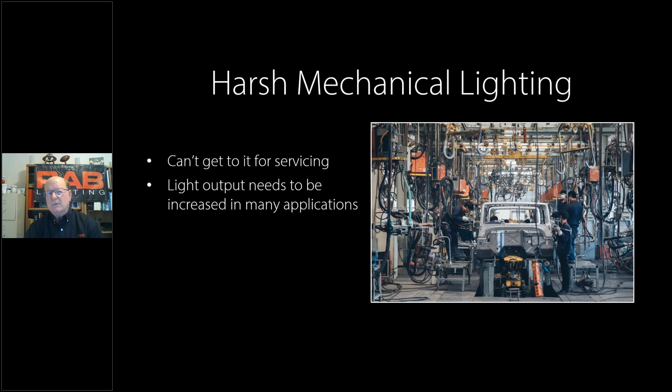So here we go. Going into a mechanical harsh environment. If you think about this, you can't get to it for servicing. You see all of these things in this picture, all types of obstacles, things that prevent you from actually providing the service that you need to do. The light output needs to be increased in many applications, and we'll see why in just a few minutes, because there's multiple reasons. You just have to increase the overall lighting because there's so many things that are in the way. And then the vertical obstructions make it really difficult.

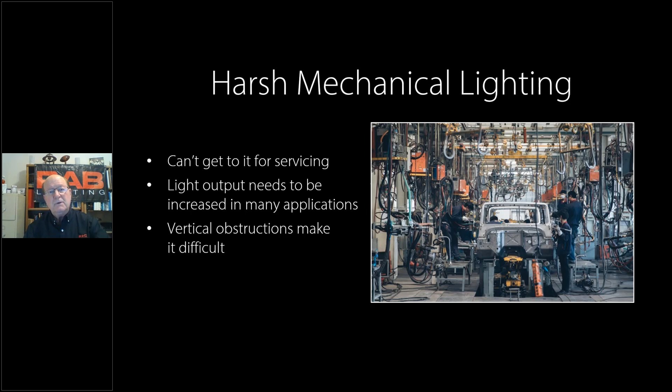So it's not just the horizontal, it's very cluttered, if you can call it that, and it's hard for the light to bend around a corner. In fact, it's impossible, except maybe if it's reflected off of another surface. So that's really important. And then shadows are often present because of all these vertical obstacles and other things that are in the way. And so you've got to be prepared to shut down operations. It could be anything, any kind of surprise. We'll talk about fluid motion in just a few minutes, but for various reasons in a harsh environment, you've got to be prepared to shut it down and be ready to do that.

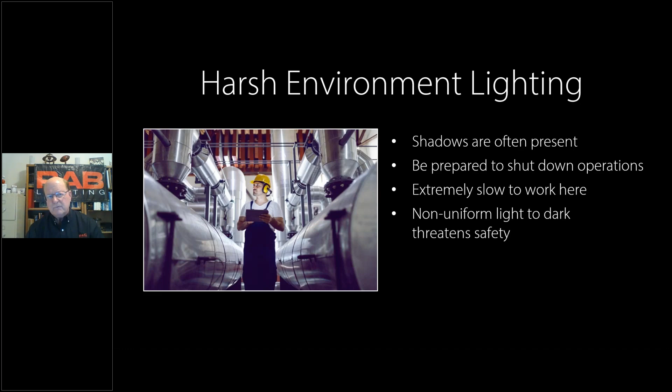Also, because of this, you work slower. You just can't work at a normal pace in a hazardous location. It's almost impossible to do that. And then we have this non-uniform light. The dark threatens the safety. You don't feel safe, certainly because of all the shadows. And so more general lighting may be needed. You may not even be able to put a specific light close to where you're working for whatever reason. So you have to increase your general lighting to get the reflections to increase and get where you need to go.

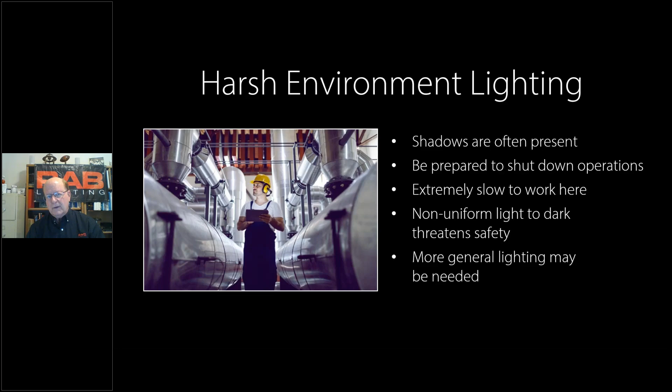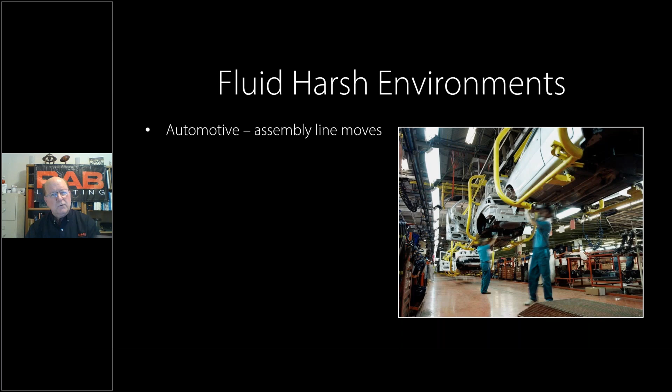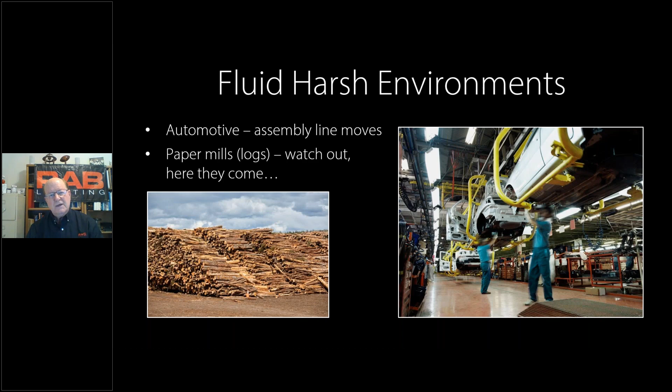That's very unusual and not common in general applications. So now let's talk about the fluid, harsh environments. And by fluid, we're really talking about motion here. So think about an automotive plant where the assembly line moves or other things move that cause this to be different. What about this? So paper mills, we need to get out of the way because here they come, right? So the safety is a big factor in those applications.

So now let's move over to chemicals. So here's a story for you. So this contractor, and I'm going to call his name, he's a friend of mine in the lighting industry. His name is Roger Lane. So he told me about a personal story of his where he was working on a lighting retrofit job, and he got up the next day to put his shoes on, and he noticed that the soles of his shoes were disappearing. They weren't what they were the day before because of working in that environment with all the chemicals. They were coming apart.

And so special conduit coating lasts only 2 years. That's another thing. You think about conduit, putting it in, it's going to last 40, 50, 60 years. In a harsh environment, not the case. And so they're often worse than salt environments. And people say, there's nothing worse than salt. Yes, there are. And so chemical environments are like that.

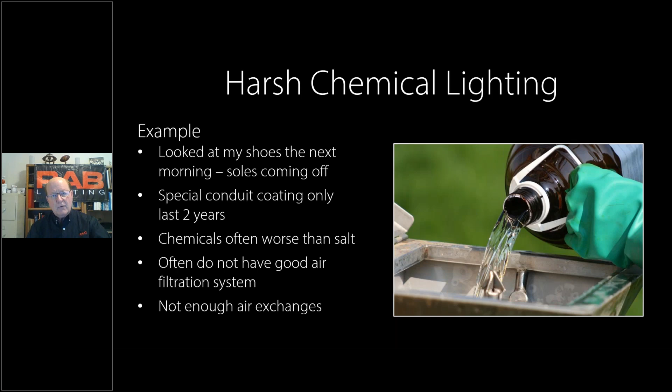And then with these chemical environments, you don't have the good air filtration system. So if you're breathing something that's not good for you, we know that's not good for our long-term health. And so we don't have enough air exchanges, possibly. That's really important from an HVAC design standpoint to account for this harsh chemical environment.

So that's another one. And speaking of this, in a chemical plant, you have two separate monitors on the human body, that's what you have in this application. If either one of these monitors goes off, you have to exit the plant immediately. So that's what they do to protect the people that are working in that environment.

So let's now move to corrosion-resistant finishes. Now this is your friend. So what are you going to do with light fixtures working in some of these environments? So RAB introduced in 2017 corrosion-resistant finishes. Some of those include salt spray, which we just talked about, or maybe acetic acid salt, or maybe you go up and down in humidity, so it's cyclical, or maybe sulfur dioxide.

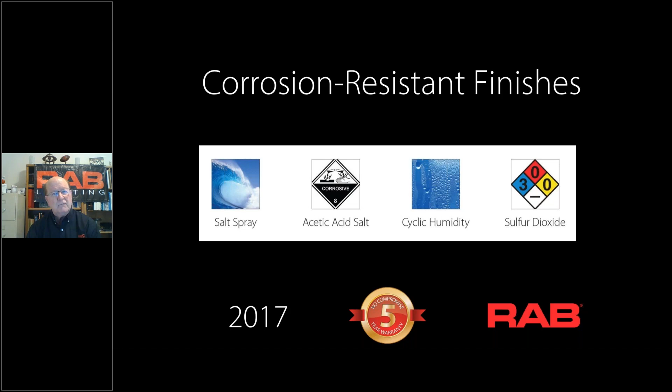So first of all, this corrosion-resistant finish mainly works on metal fixtures, not on plastic fixtures, as a general rule. Many of the fixtures at RAB can be adapted to this corrosion finish. Not all. So if you have a situation like this where you need protection, check with our district sales manager or our rep, and we'll find out, if we don't already know, if this can be applied. It's a little cost adder. It certainly takes a little longer lead time, but it's available and it could be a lifesaver for your project.

Now, here's an example. So chlorine, that's a chemical in the swimming pool area. This particular floodlight is an FX300 with this finish applied. And so this is the application that we have, lighting from the perimeter in Texas.

So when we think about harsh lighting, it's not always chemicals or other types of harsh things. It also could be environmental lighting. So what about light trespass? Light trespass is going beyond the perimeter and making it harsh, maybe for the neighbors, spilling across that property line, or maybe lighting going up and lighting the sky and having sky glow.

Or perhaps the last one is glare. We've all been where this guy is, where you have these blazing headlights coming into your eyes, putting a veil over your eyes so you can't see. So this is also harsh lighting, and we at RAB have ways to mitigate that.

So it falls into a little bit different type, but it can be a form of harsh lighting. Here's a story that's very interesting. So Wendy's, everyone I'm sure knows Brother Dave and the square hamburger. And so there was a lighting ordinance in Cary, North Carolina. And the reason I know about this is I wrote it. So the town of Cary, very unusual situation.

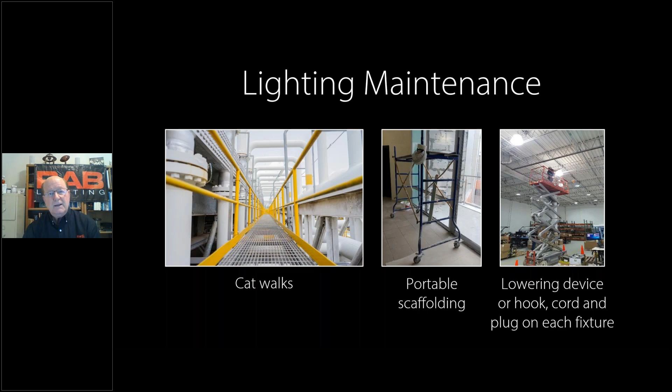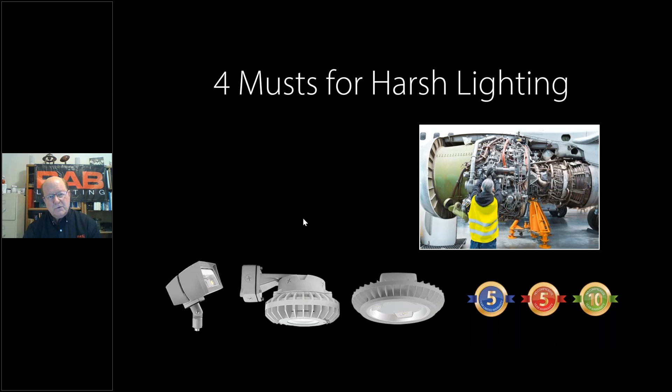There's 4 musts for harsh lighting. And you can see this breakdown here of this photo of the airplane engine. So the first one is buy a good quality LED fixture. And it just so happens that RAB sells those. We also have 100,000 hour L70 life products, because if you have a hazardous location or harsh lighting, you don't want to be going in there very often, right?

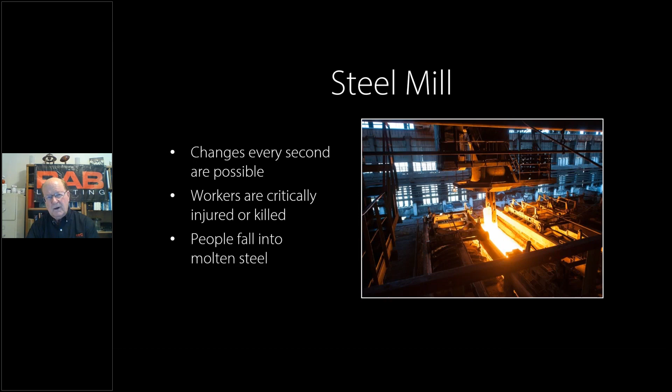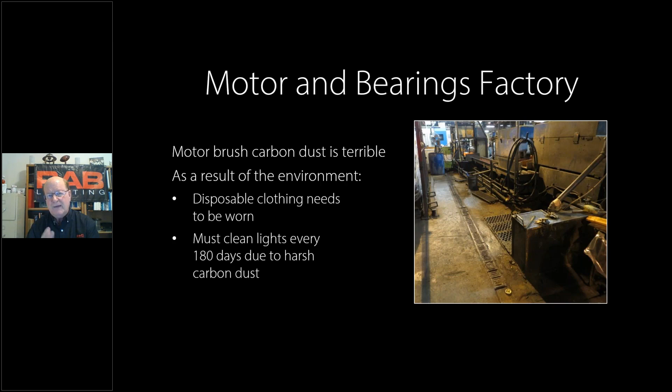So you just have to keep things clean because of that dust. So these are some actual differences. So what is different? Let's go into a little bit of a summary about these harsh environments. So number one, labor is a factor, and it's high. You are going to provide more labor than you estimate, unless you're used to doing this every single day and you know to take what you think and double it or whatever. It's really difficult because it's a high factor.

The equipment rental is very, very common, used quite often. Also, count on a lot of unexpected hours. Things happen, and when they happen in the harsh environment, they're harder and they take longer to deal with. Obstructions of all types, whether they're temporary or permanent, are the normal situation. And then we talked about this fluid motion. Something's coming behind you, something coming from the side. At any moment, you have to stop what you're doing and allow for that to be safe.

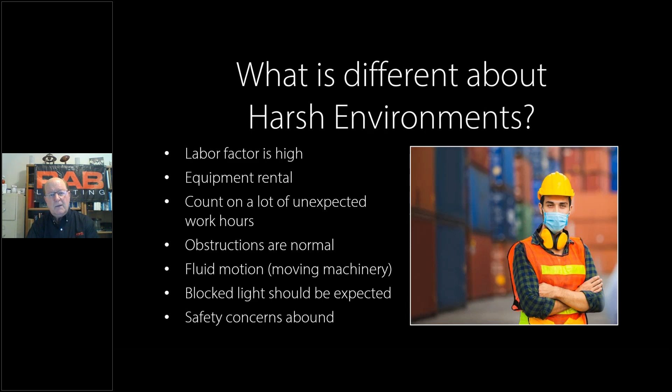And then the light is blocked, and you expect it because this is what happens in this type of environment. So you either have to account for it with portable lighting, or you have to provide more general lighting to accommodate this. And safety concerns are everywhere. So things to remember: we want to maximize and make this as easy as possible by combining things. For instance, with this equipment, tie the fans for the paint booth in together with the lights. When the lights go on, the fans go on. So that makes it automatic.

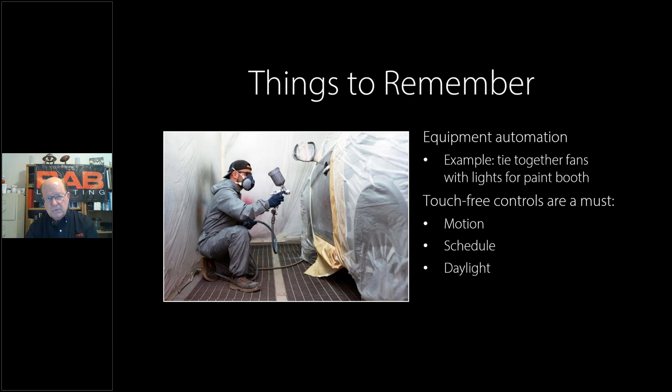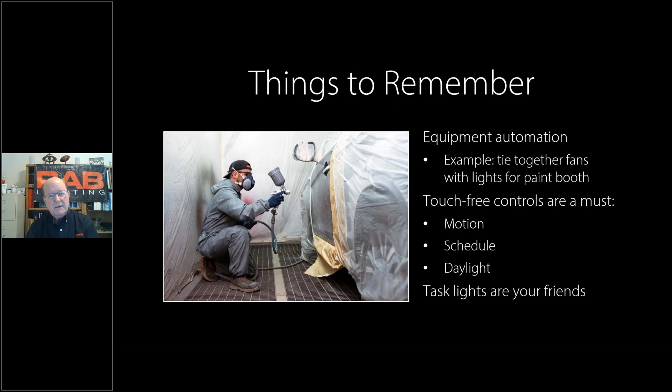And we want touch-free controls. Think about the environment. You really have to have it for motion, or for schedule, or maybe daylighting controls. It's going to be touch-free and it's going to be automatic. And then the task lights are your friends. In a harsh environment, they can be a lifesaver. Now, we talked a little bit about what the environments are like. Let's invite Ben on now to talk about some products and some solutions to this.

Ben? Now, one of the things that Bob has been mentioning, the word of the day from Colleen, is this word harsh. Now, harsh is different than a hazardous location. So here in front we have the different products that you can use in a harsh environment. I'm going to start with the products that fit into the hazardous location category. We've actually been doing hazardous location fixtures since 1957, with our explosion-proof fixture. In 2014, we came out with the HAZBAYLED, which I'll be speaking about shortly. The HAZBAY came out in 2016, and the HAZ FF-LED, our future flood, which is almost identical to the current FF-LED that we sell in normal installations.

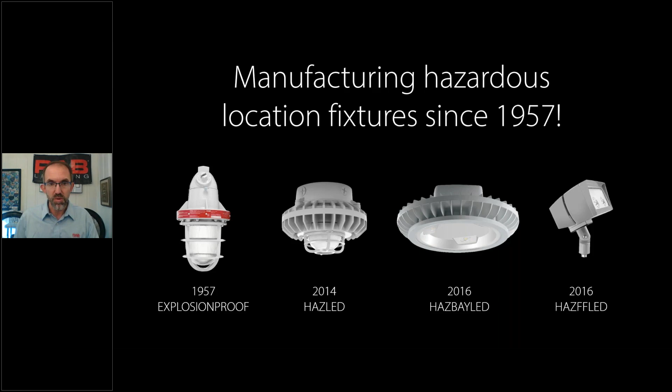But let's get into the definition of what hazardous location means. Hazardous location has a certain set of definitions. The first one has to do with the class. You will hear people refer to class 1, class 2, and potentially class 3. Class 1 has to do with gases, class 2 are dust, and class 3 are fibers. The next piece of the puzzle is what's called the division. The division has just two pieces: is that hazardous material, whether that be gas, a particle in the air, or fiber, normally present?

So you have to design a product differently if you have open containers of gasoline or petroleum in that environment. If it's normally present, you have to build your fixture differently than if the gas or particle is not normally present. So division 2 is not normally present; division 1 is normally present. And the last piece of the puzzle has to do with the groups, categorized by explosion characteristics. A, B, C, and D have to do with gases like acetylene and hydrogen, and I can't remember the one for C, it starts with an E. And D has to do with gasoline, propane and gases like that. Groups E, F, and G have to do with the different particles of dust.

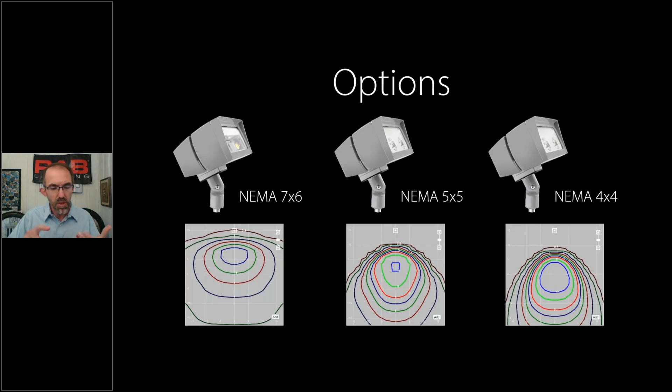And we can actually see that in the ISO foot candle lines. With that 7x6 on the left with a wide flood, we can see that the distribution is just really spread out, and that 4x4 is really taking that floodlight, creating a nice, good hot spot because you're trying to illuminate something that is a certain distance away. So that's what we get when we choose the different beam distributions. Same pole, same mounting angle, same wattage, different distribution.

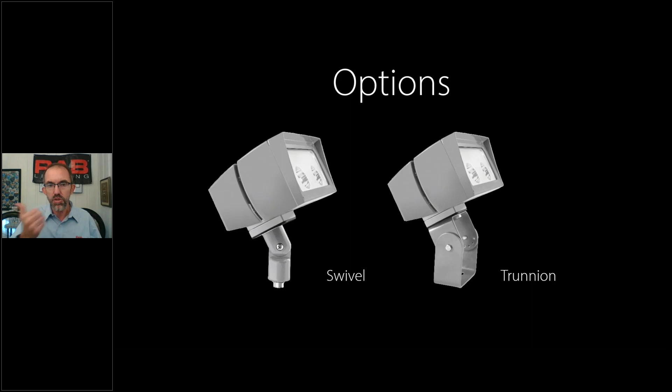The last option that I have for the floodlights is the swivel arm on the left and then the trunnion mount on the right that are available. So what I'm going to do is I'm actually going to ask Scott Teague. He is our sales guy. I'm going to unmute him and bring on his webcam, and he's going to talk to us a little bit about a grain storage and processing plant.

Yeah, thanks. The project that I want to talk about is Arden Mill Grains. The problem in this grain facility is, number one, it was a 24-hour facility, so they were working at night. The floodlighting around the grain silos, the catwalks, and the supply lines were at end of life and had equipment in various states of disrepair. We had different fixture distributions on the floodlights. We were using a number of different legacy light sources, and believe it or not, it included a bunch of quartz halogen, which were not even hazardous location fixtures. So we had lots of issues in this old facility.

The exterior facility lighting was required to be Class 2 Div 2, so that was a QC requirement due to possible grain dust explosion. So we had to get the plant up to QC required lighting throughout and update to LED. As Bob mentioned previously, this application had lots of vertical illumination obstacles. The facility supply lines, walkways, the catwalks, and the operating equipment created dark areas and resulted in uneven lighting throughout the facility. We had lots of quality of light issues, the facility equipment blocking light everywhere. And did I mention, of course, that we didn't have any money to spend? That's always what happens, right? That's always the issue. We had a very tight budget.

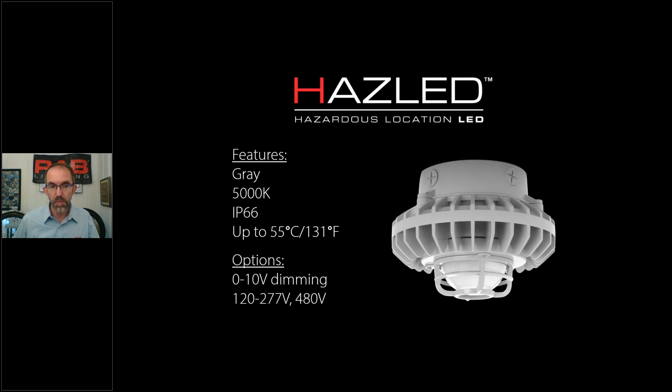Appreciate it. Some other products that we have available beyond those 2 that we mentioned earlier happens to be this HAZLED product. 26 watt, 42, 80 watt versions, 2,850 lumens all the way up to 8,800 lumens. It's only in gray, only 5,000 K. This guy is IP66, and you could have this in an ambient temperature up to 131 degrees F. Options just like the HAZBAY: 0 to 10 volt dimming. This one we actually have a 480 volt version of. We have it in a stanchion mount, so inside the model number you'll see an S. The P stands for pendant. The B stands for wall. And if you see an X in the model number, that's how you get the ceiling mount version.

With this also, you have a clear globe, a flat lens, a frosted globe, or a frosted flat lens. Now, when you think of these different products, whether it's clear or frosted, you have to think about the design and how much light you need in the space. You're going to get more light out of a clear lens than you will out of a frosted. And obviously, if you do a frosted blue, red, green, or amber, which only come in the 80-watt version, that globe on the top steals a fair amount of light away from the unit.

You have to concern yourself with how much light you need out of the base unit, because things like the die cast guard on the left will actually block a lot more light, and then the wire guard will be a little bit less. So if you do a wire guard, a die cast guard with a frosted domed lens, you're going to have to bump up your wattage compared to a clear flat with no die cast guard on the product. So you have to concern yourself.

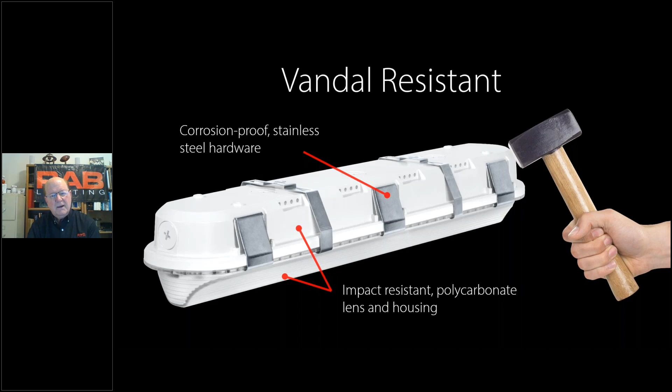Didn't mention vandal proof, or not vandal proof, we actually call it vandal resistant today, because it's not really proof, but it's highly resistant to corrosion. It has stainless steel latches, not plastic, and it's also impact resistant with this polycarbonate lens instead of acrylic, and then the housing also is polycarb.

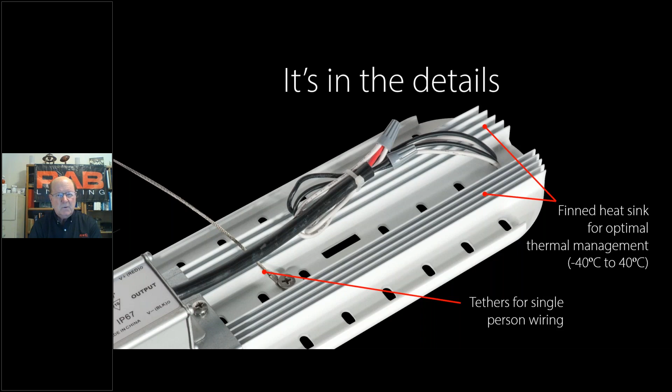Getting into the details here, you see the heat fins there, which give you excellent heat management all the way from the cold, minus 40 C, all the way up to plus 40 C. And the installation: the tethers make it possible for one person to install the fixture if that's needed. So all of those are inherent in the Shark.

The mounting is, you see those two screws, which is the standard mount to the wall or the ceiling, is the way that works. But there are a lot of other mountings. So you can do a 45-degree angle, or you can do a V-hook, or directly to the J-box, or it could be a wall mount, and of course these are, as we mentioned, vandal resistant. So the various types of mountings make it very, very flexible.

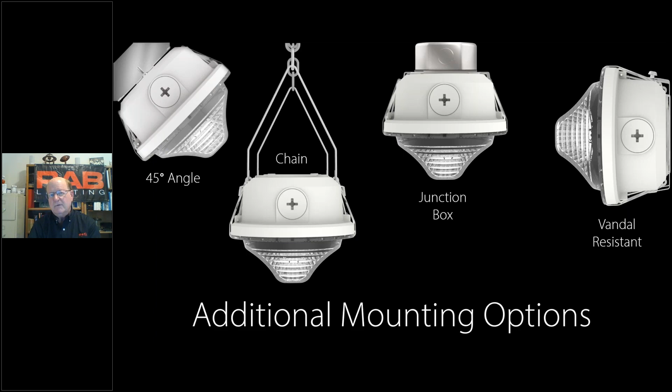And then you have this tamper proof kit. So if you need this for certain types of environments where people want to mess with the fixture and so forth, you have this tamper proof kit that makes it even safer and more vandal resistant.

And so the options with the Shark. As Scott mentioned, you can get a battery backup with this. And also bi-level. So with bi-level, you say, well, okay, I always have 100% and I want 100%, but you can also get 75, 50, or 25. You don't have to have 100. You could have 75 and 25. So it's two levels, which is, of course, bi-level, and the sensors.

So the option there would be a microwave. This is perfect because you have this microwave behind the lens. You have water, you have washdown, so you need that sensor behind the lens for protection. And so that's our MVS sensor. And then, of course, it's equipped and readily available with LightCloud as well. So those are some of our options there with the Shark.

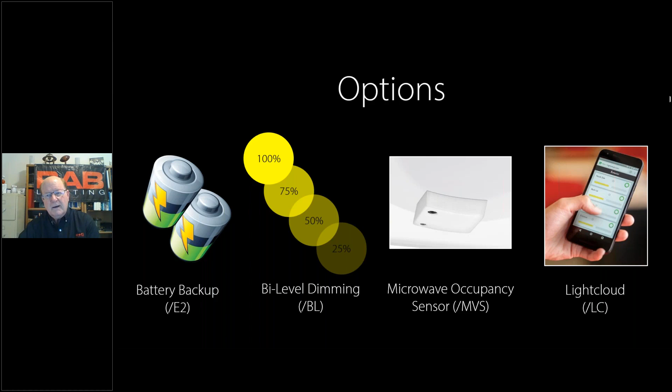So I'm going to invite Ben back in. He's going to take us through the review of our takeaways. Ben? Yeah, so thank you, Bob. Appreciate you covering those products.

Our top takeaway is that harsh environment expenses are often underestimated, which can drive up costs and reduce margins. Takeaway number 2, understanding harsh environments will ensure profitability and provide customer value. And RAB offers multiple products for both harsh and hazardous locations. So that takes us to the end of our subject matter.